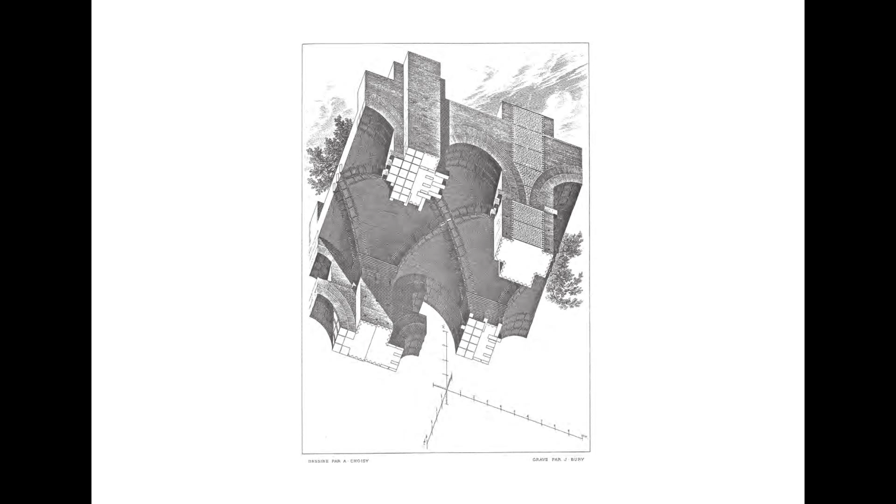And so when we're talking about this idea of fullness, obviously it's part of a great tradition of architectural construction, where we're building with massive materials, which originally, of course, was out of necessity. And this sort of exploration of a massive architecture, of a very full architecture, was really brought into question in the 19th century, early 20th century, out of questions of economy of means, where we started to really question the amount of materials that we were building with, the types of materials that we were building with, and the space that they occupied in our constructions.

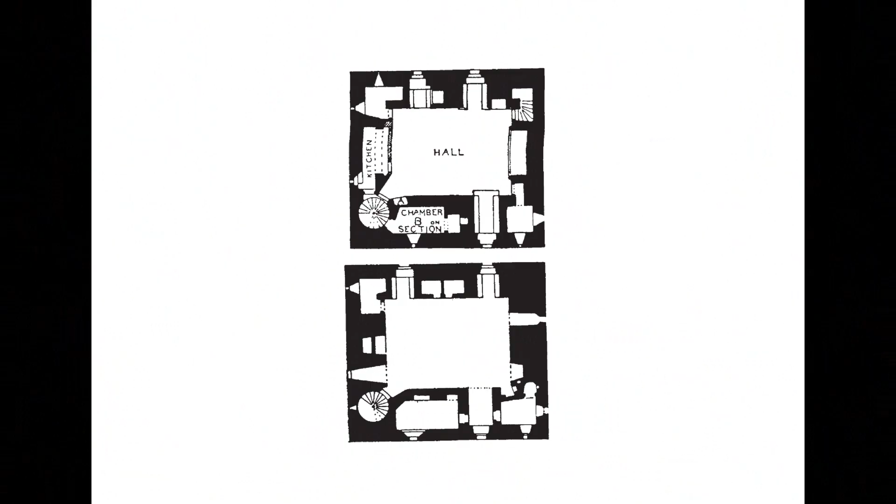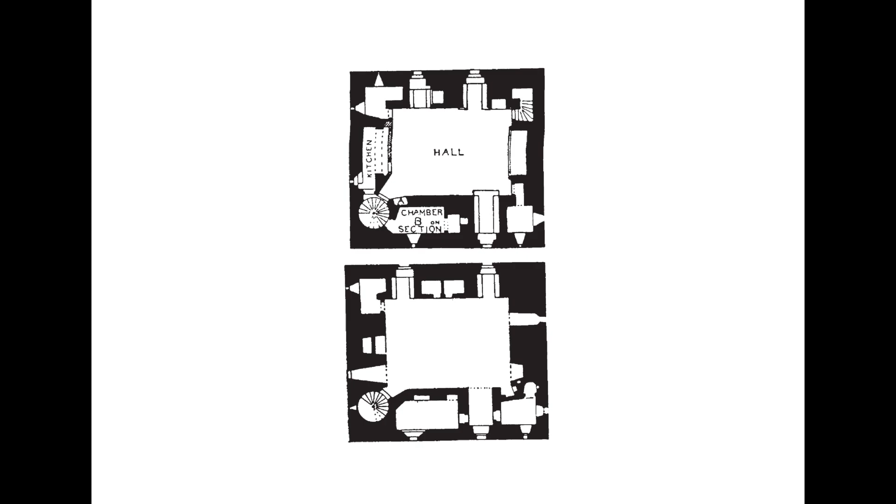But what we find really interesting is that this idea of massivity, of fullness, when we start considering it very closely, we very quickly overcome only a sort of constructive point of view. Because when we start considering fullness, we see that it's a question about representation. So of course, this great tradition of the Beaux-Arts school, where we're looking at poché. I don't know if this is the same word in Estonian, but it's this tradition of representing the architectural drawing by filling the contours of what's defining the built space.

And when we start looking at these questions of representation, obviously it changes the way that we're conceiving of the architectural project. And this is what we see in the work of Louis Kahn in his studies of the Scottish castles, is that when we start really considering the poché and the fullness of the architecture, it takes on actually a spatial quality, and we start looking at the fullness of a structure as being capable of taking on the dimension of a room, of the connection between rooms, and it's this sort of starting point, these questions which emerge from the consideration of fullness, that we find very interesting and exciting today.

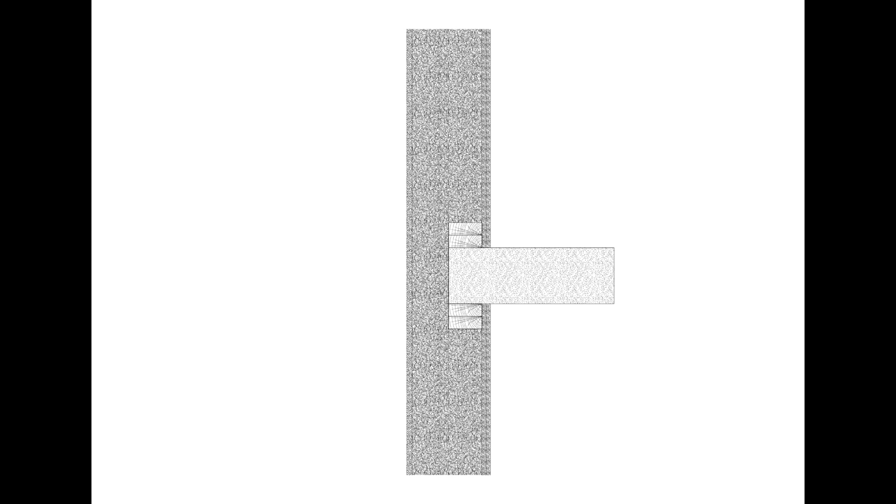And we find that exciting because what we've noticed with working with natural materials over the last few years is that when we're working with natural materials, and when we're working in the current environmental and climatic crisis within which we find ourselves today, architects are really driven towards considering the thickness, the fullness of the buildings that we're creating, and particularly in relation to the facade, which is this interface between indoor and outdoor.

And when we are working with natural-based materials, so when we're working with stone, with hemp, with straw, with all kinds of bio-based and geo-based materials, we can no longer manipulate the very fine thickness, maybe, that we've been used to manipulating over the last 50 years. These are materials that require a much larger dimension, and we think that this fullness, this very large dimension, is interesting to consider.

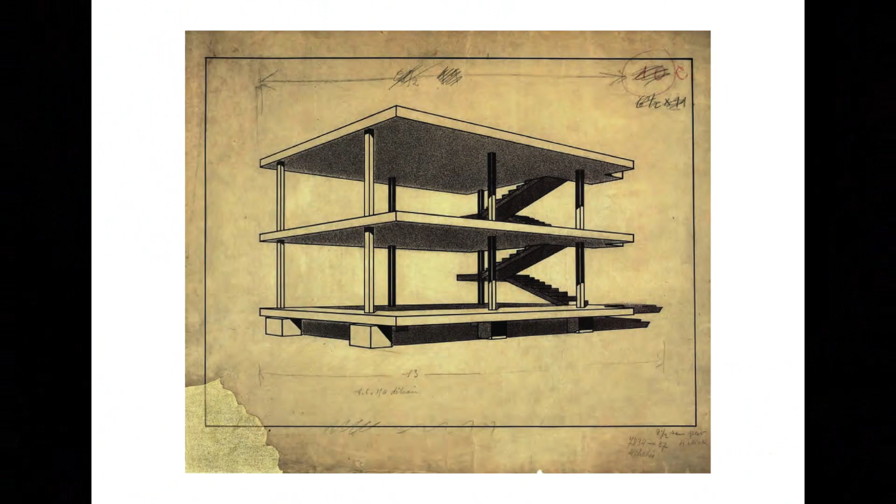It is interesting to consider in the architectural project, and we want to present this concept in opposition with this prototype of architecture, the Maison Domino, which has really come to define a sort of extreme efficiency in the way that we build, which goes so far as to completely dissolve the facade. And we think that today this is really problematic, and we can't continue to build with this image of a facadeless building. We need to consider the way that we treat the envelope of our constructions in a new way.

And so in addition to this, let's say that this diagram, this drawing made by Le Corbusier in 1914, the problem there is that the thickness is totally abandoned, and it was the beginning of an interpretation that was hoping that there would never be any kind of separation between the inside and the outside.

And what we like to investigate today, like Heather was saying, is what if we were giving another interpretation to that? What if today this ossature domino was still a good prototype to look at, but let's give it another direction, another trajectory. So it's not killing modernity in its efficiency, its economy, but rather looking at modernity as something that has another story to tell. And it's funny because in the projects we will be talking about today, we realized yesterday with Heather that they all start somehow with this prototype of ossature domino.

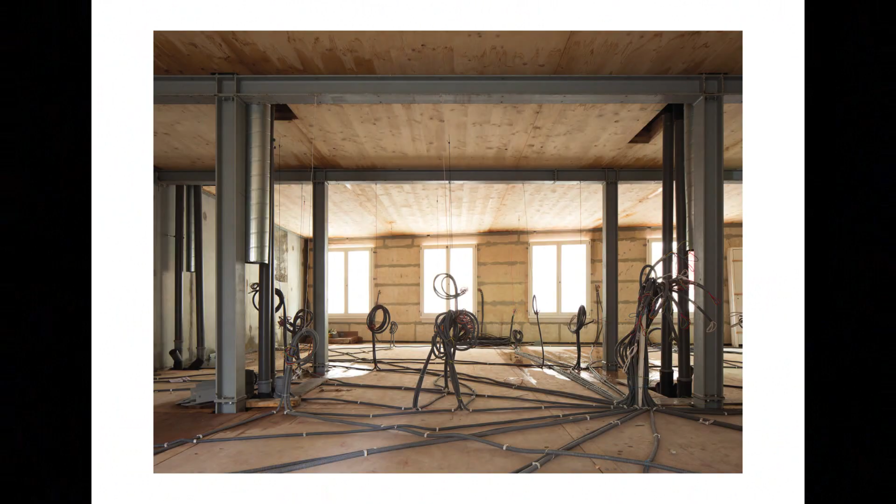So this is the building that we made in Rue Oberkampf, that we delivered a bit more than 6 years ago now. The relation with the ossature domino is kind of obvious because you can see in the foreground this steel ossature that is bearing the wood floors, and at the end you can see the load-bearing stone facade.

And it's the first time we present the building from the inside, saying that one issue with natural materials is the fact that they never come alone. They are always assembled with other materials, and when you say that you build with stones, it's not really correct. Let's say that 20% of the building is in stone, but all the rest is technical things, shafts, steel, wood, as natural as possible, but not everything is natural.

And we're very interested in this idea of natural resources, that at some point you have to negotiate when you build a building with other resources that are all geo-based resources, but they don't raise the same amount of energy going from a resource to an element of architecture. So we have to be aware that building with natural materials is still a negotiation between different trajectories.

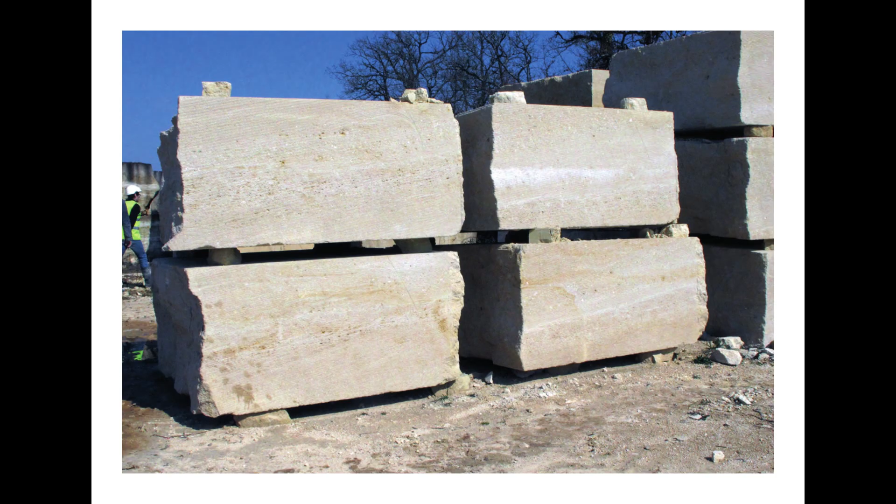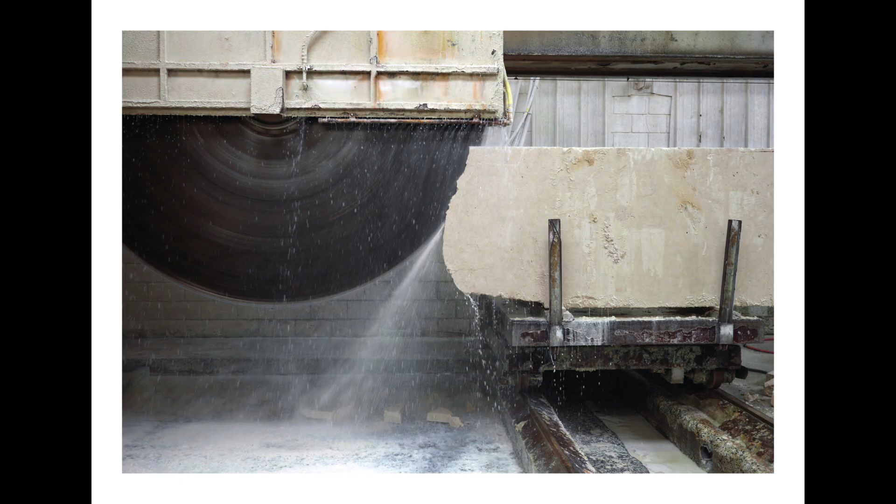So we were digging into the ground and realizing that there is something in between the moment stone is a resource and another moment where it's been dug out of the ground and it starts being an element of architecture in your mind. And what is great here with this natural resource is the very few amount of energy that exists between the moment where it is the ground and the moment where it is an element of architecture. So the very low energy engaged in the transformation, the very few displacements, all the very, very few gestures that you apply to the resource, and then it becomes an element.

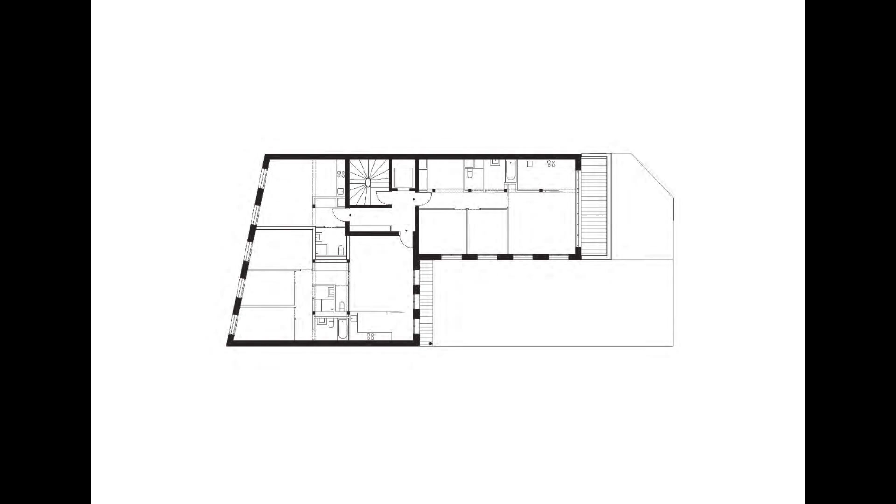So that's the plan. The pictures were taken from here, the first picture of the site from here. So you can see the two alignments of steel structure. And then from here, this is the inside courtyard.

And again, we are very interested in applying to the stones other elements such as concrete to kind of get around or to escape from this war between stone and concrete, which always has been profitable to the cement, let's say. So we kind of stay out of the debate and rather defend the idea that stone has to be more and more important in the building industry. But cement will always be here, sometimes for good reasons.

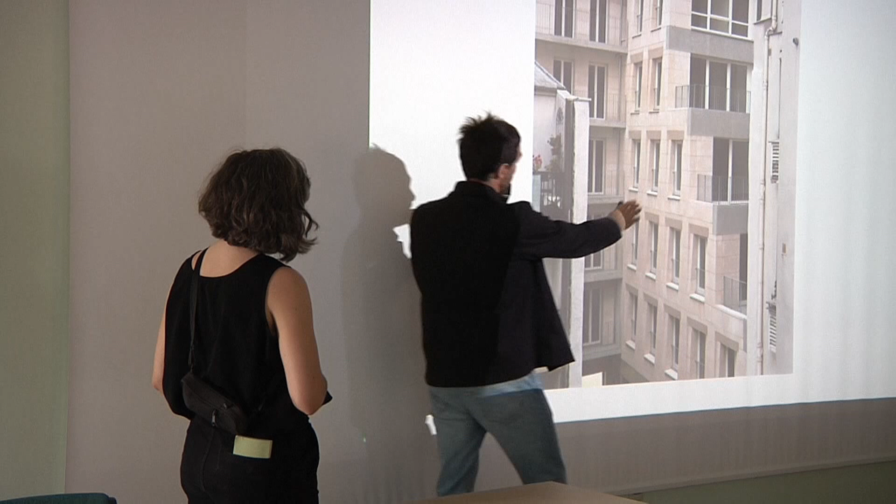And we're very interested in the way they negotiate together and how cement gives to the stone some actuality, some contemporaneity, let's say. So we use it as lintels in this part of the building, in the inner courtyard, to give to the living rooms bigger openings on the outside.

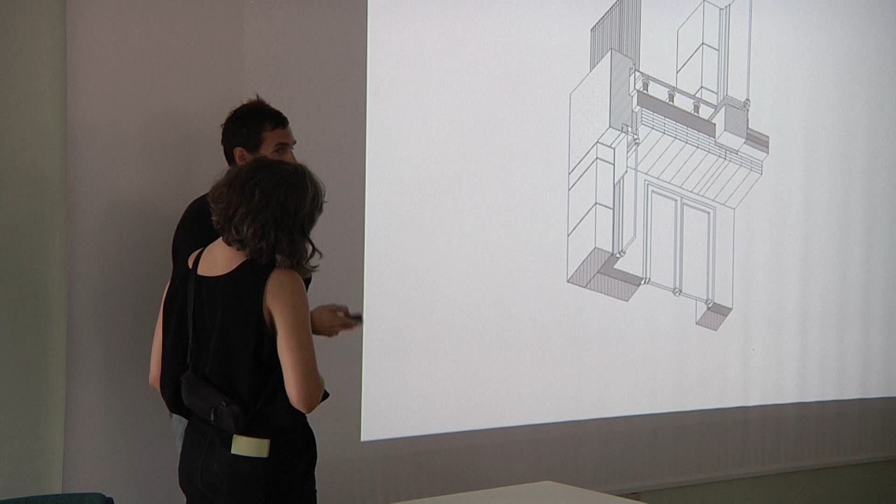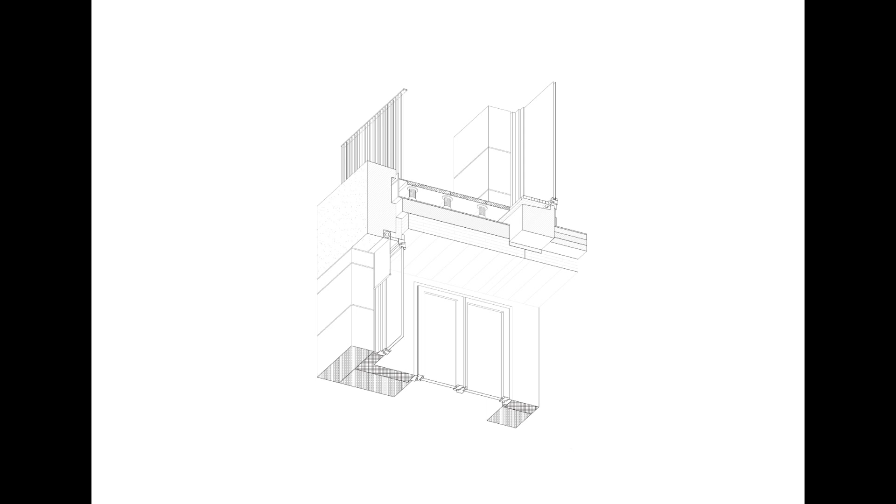And we draw, just like the drawing Heather was talking about at the beginning. Drawing the building is something that we do a lot, drawing the construction details to always express that we need to represent the detail, the construction, how things come together, how they negotiate together, and how through this assemblage we give to any kind of element of the assemblage a power to participate in the architectural language. And this is the drawing and the fascination we have for drawings that gives us this availability to understand the position of each object, just like Choisy we were talking about at the beginning.

From the outside again, so you can see the relation between the concrete, the basement, and the facade. So let's say that we're keen on showing that we have concrete underneath, so we like to say that concrete goes a little up, and that it defines a ground floor for the building, and then gets the loads from the facade.

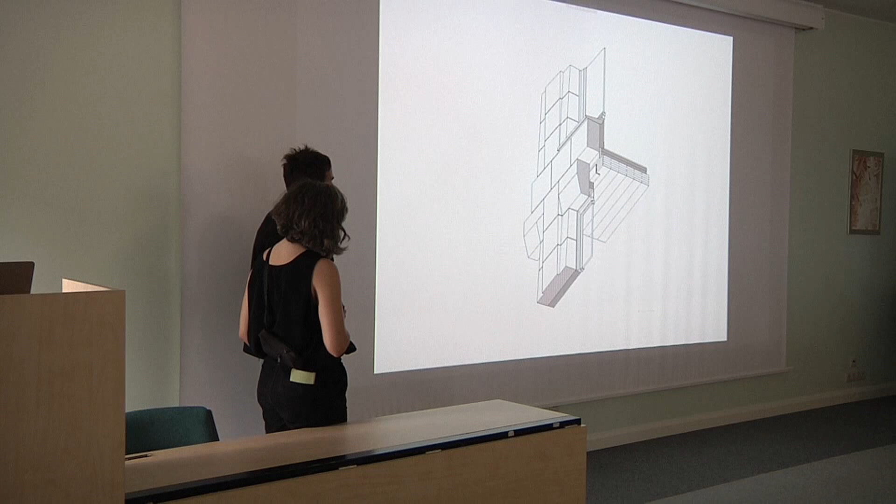Another drawing that shows this facade, so you can see, like we said, the relation with the load-bearing facade. You have a steel element here, and then the floor, the wood floor, giving its load to the load-bearing facade.

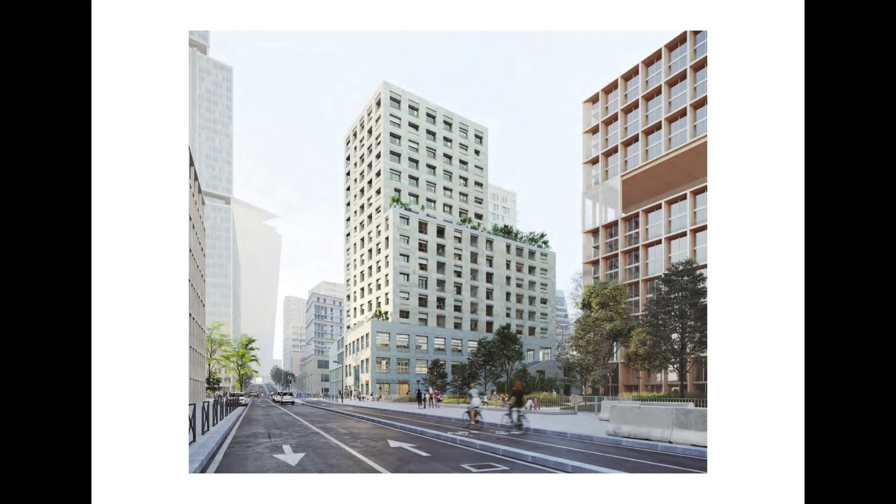And then we scaled up a little bit, from the very same kind of constructive system from Oberkampf. We won this competition 3 years ago now, so the site will hopefully begin at the end of this year. But it's exactly the same principle. So you have concrete on the basement that links two levels of the city, one high level and one lower level here, and then the load-bearing facade upstairs.

So we have there different kinds of stones. We have hard stones, getting more loads, of course, and then a little softer stones on top of the building.

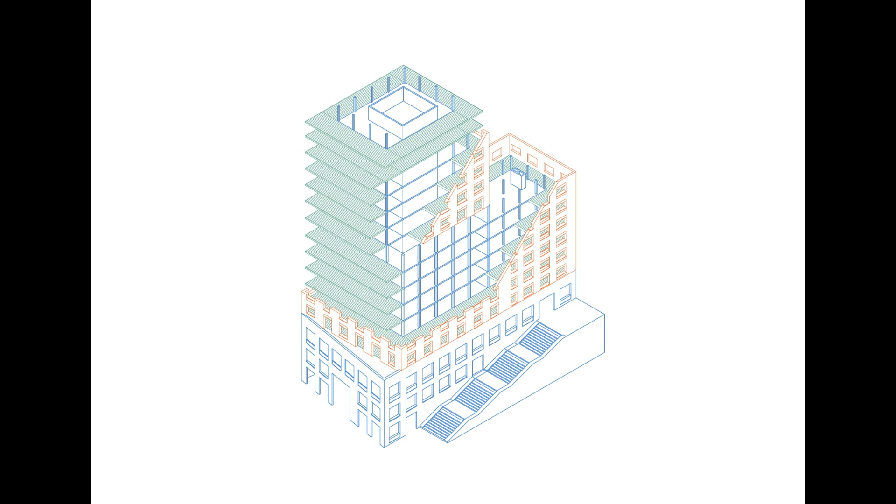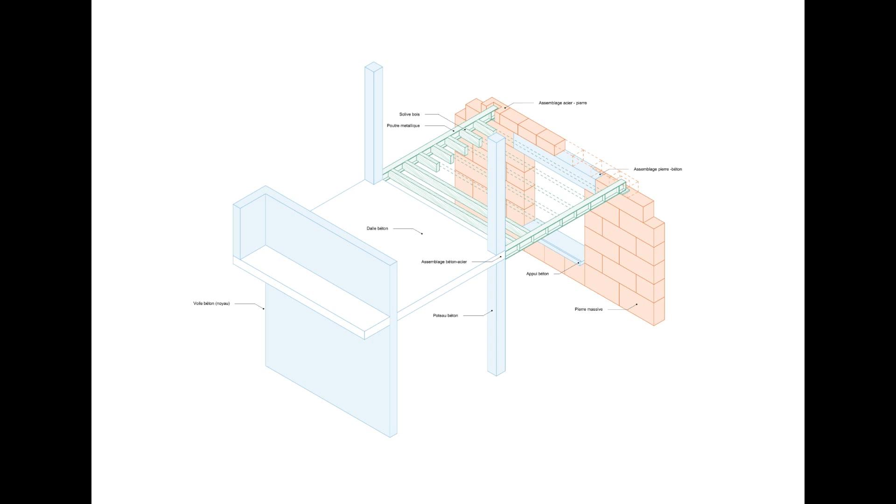And so this first project is looking at thickness from a very massive, maybe a structural and a gravitational point of view. This is another project where we're looking at this idea from a more thermal point of view. So this is an operation of social housing that we completed maybe two years ago.

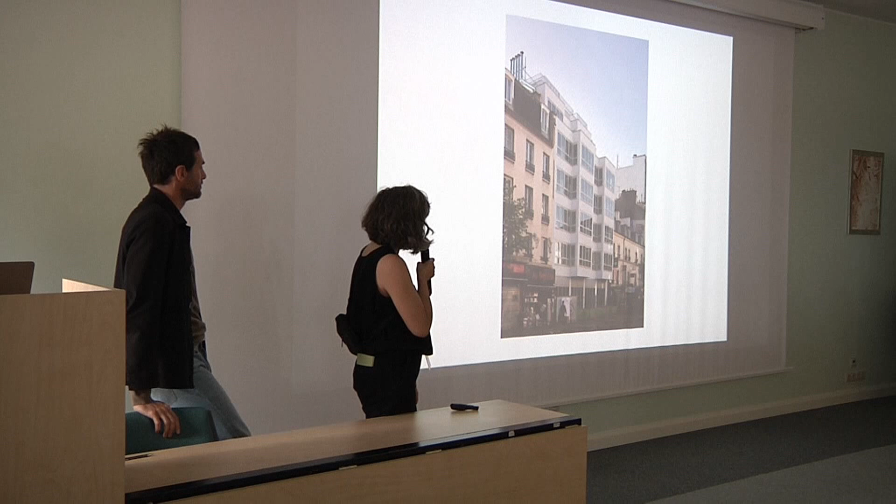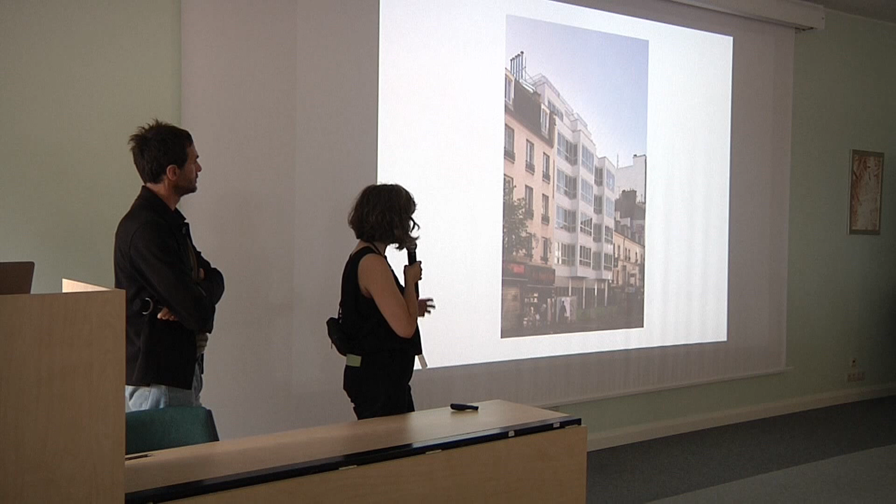And it uses a hempcrete facade, so this mixture of hemp and lime, and it's looking at the facade as an element of thickness, technically thick for thermal reasons, but also that starts to explore the spatiality of what a very deep facade can offer in terms of spaces. And so again, we find this relation with the Maison Domino. So we're not in any way trying to deny the efficiency of this structural system, but questioning the way that we can make it even more efficient, even better adapted to current conditions and requirements.

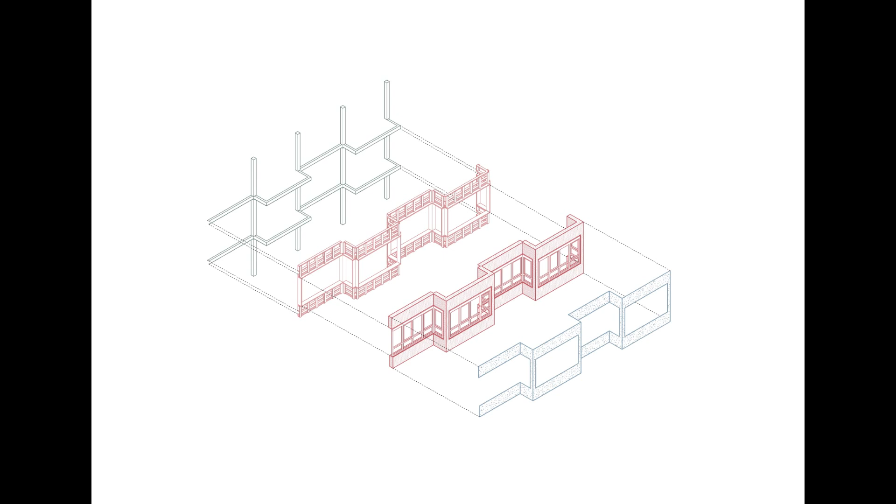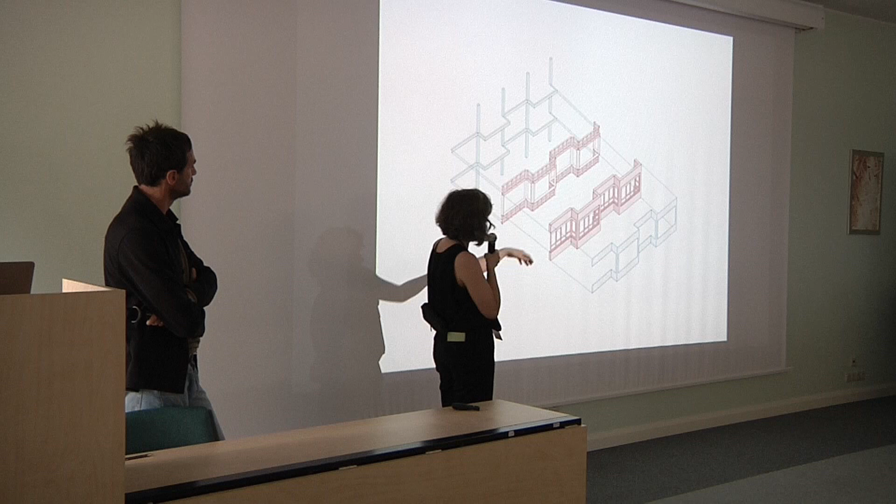And so here we see the system of the facade. So we have the concrete internal structure, a secondary timber framework within which we project the hempcrete mixture. The hempcrete attaches itself to this timber framework, and then a render finish on the exterior part of the building.

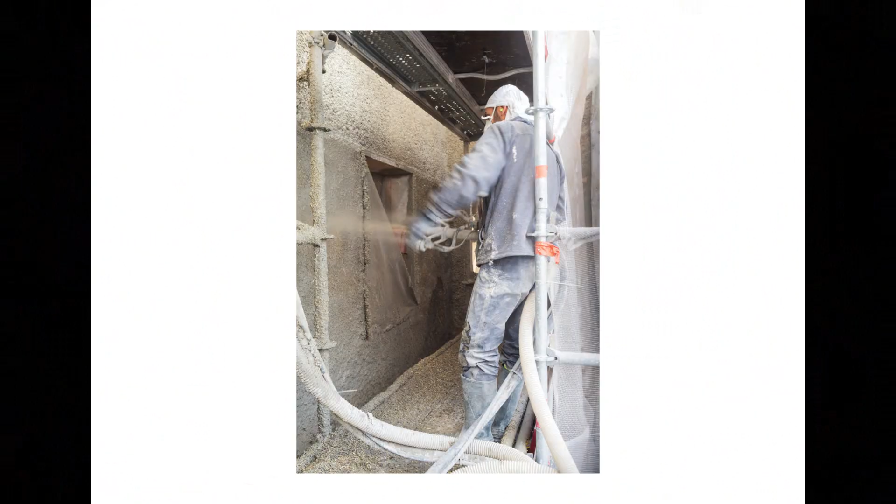And so it's a research project that we've been working on in partnership with the Université in Paris, trying to better understand these hygrothermal properties, the system of pores that exist within this material, and what it can offer in terms of level of comfort within the architectural project. And so again, looking really closely at these materials, it's going out to the production site, it's working with researchers, but it's also being present on the construction site.

So I don't know if this is a subject for you in Estonia, but in any case in France, there's a real problematic tendency right now to evacuate architects from the construction site, and we think it's important that we hold this place in order to understand the construction of the buildings that we're designing.

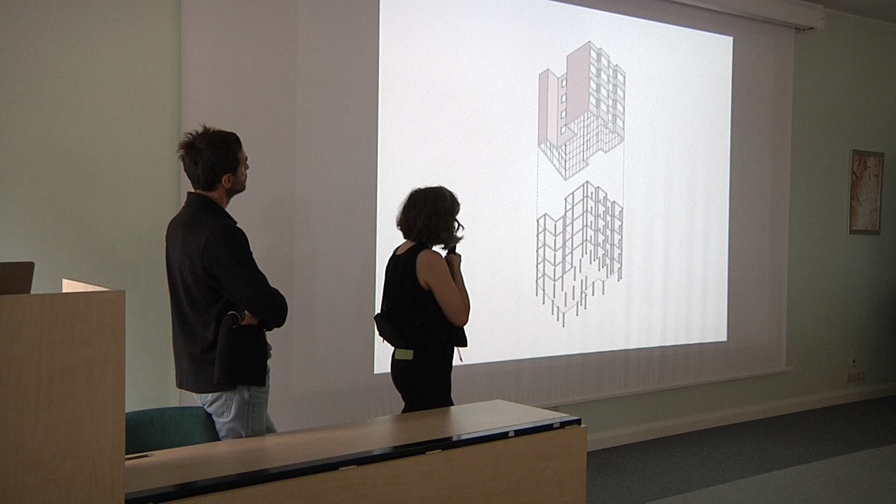And so here we see the projection of the hempcrete. So hemp can be poured, it can be prefabricated, but in this case it is projected into the secondary timber framework that we saw earlier. And so again, it's this idea of enveloping a concrete structure where we try to use the least amount of concrete. So working with just a slab and post construction, and then this very thick insulating cover, which comes and envelops the totality of the building.

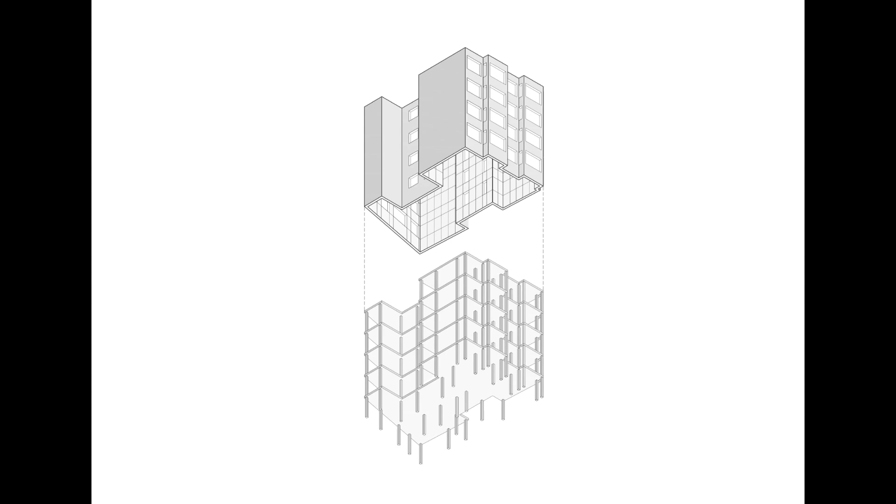And so again, this is a detail of the facade, and we see the ways in which working with the idea of thickness also starts projecting itself into the spaces, into the quality of the spaces we're creating, where the rooms are navigating within this thick facade to project themselves out at certain points, living spaces out towards the street, or recessing inwards towards the apartments.

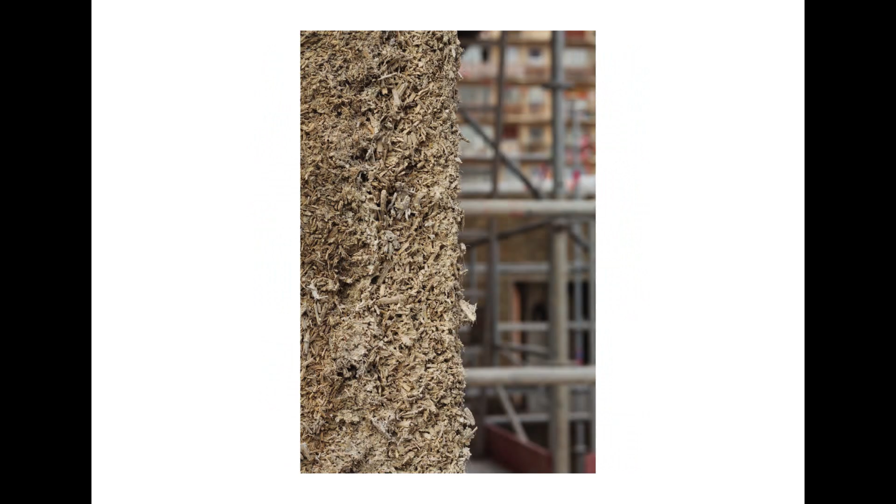And if we go back to the construction site just a step, this is a zoom of hempcrete. This is what the hempcrete looks like up close. And it's interesting to consider because compared to other bio-sourced insulators, which is often wool insulation, here we're working with the hemp straw, which when it's combined with the lime, really gets suspended. So the lime solidifies, and the hemp fibers get suspended.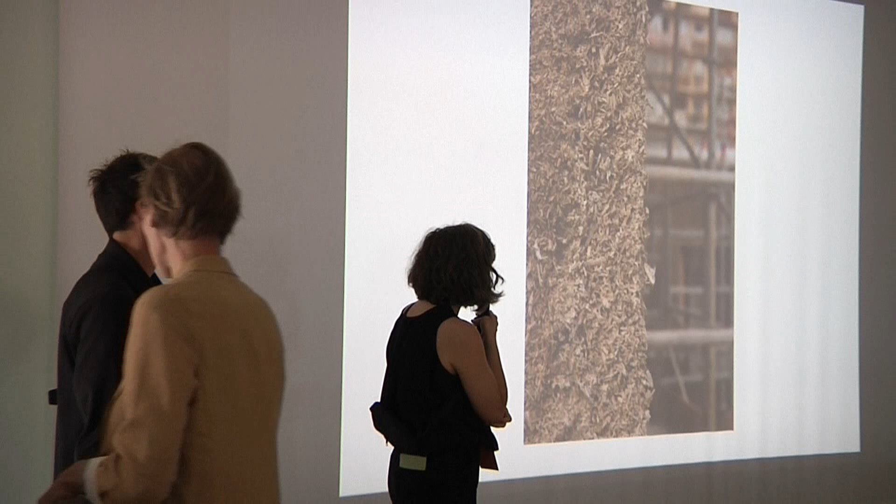And this is what is very interesting from an insulating point of view, because it traps air within the facade, but it also has qualities of inertia, which come from the use of lime. And so the presence of the air that is within this insulating element is another idea that we find very, very interesting to consider.

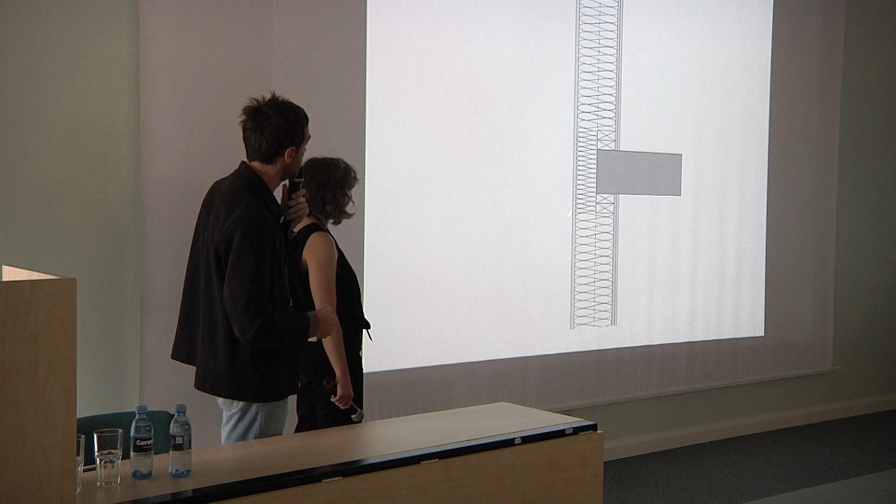So this is how we represent, let's say, a facade and a plinth. This is another way to represent it from the building Heather was talking about. So you can see the stucco, the insulation, hempcrete, but so far insulation was represented like this. And then the 2 Fermacell panels on the inside. Then you have here the concrete slab and pieces of wood that you were seeing on the axonometric view previously that hold, let's say, the hempcrete together.

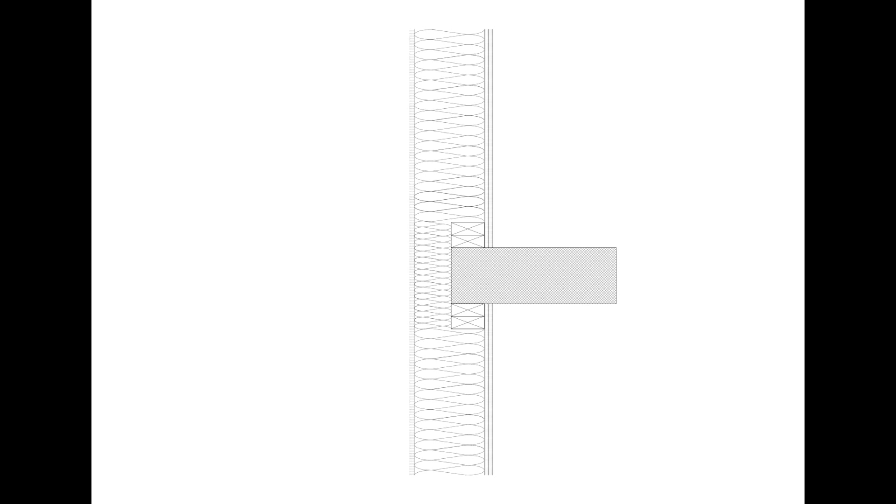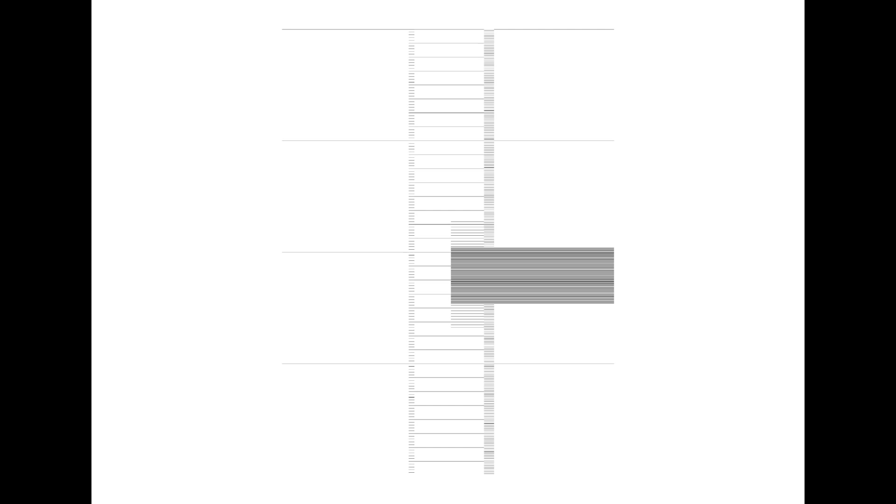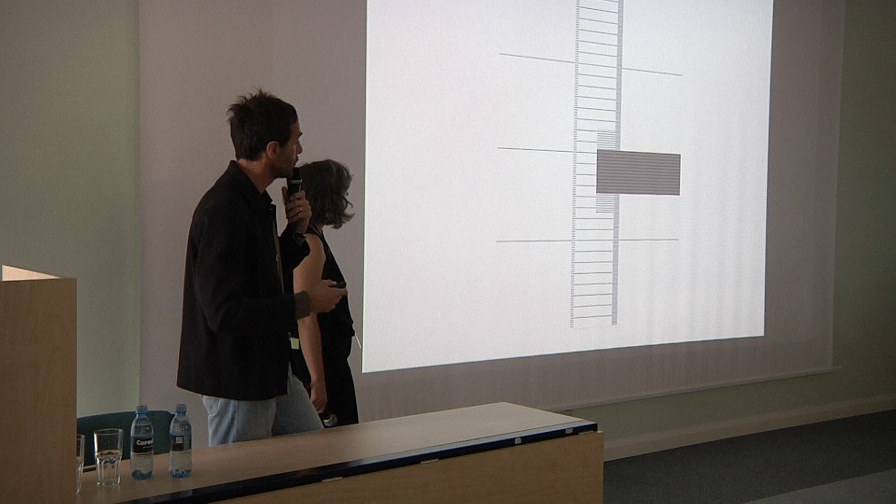But again, we can reconsider the way we represent the thing and introduce the question of the air. This drawing represents porosity. So we bring in and start representing anything that is in the frame: air, plaster, hempcrete, Fermacell, and air, the inside slab. So we start saying that air is everywhere, but this represents density. So density of the air, density of the stucco, density of the limestone, the hempcrete, density of the concrete. So you can see the concrete gets a lot of power in the drawing.

Then you can talk about conductivity, and this is something different. Porosity. So you can see that air becomes super strong in the drawing, and that hempcrete loses its power in this matter of... the word again, sorry. Yeah. Conductivity, sorry.

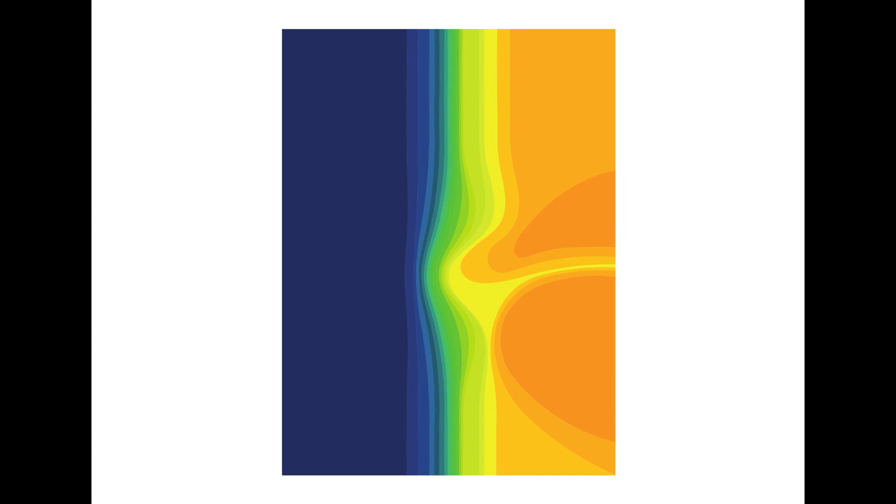And then this is temperature. So we were very interested in representing several aspects of the materiality of the materials constitutive to a drawing. You can see the characteristics that we were showing on the previous drawings, but you also have phenomena that we want to represent, such as temperature in winter, for instance. And you can see that the temperature of the air is giving a temperature to the facade, and then it slowly increases the temperature because of the insulation and the heating coming from the inside of the building.

So this is again a way to participate in this idea of rationality, of rationalism, that kind of arose at the end of the 19th century. And in addition to the structural, because we don't say that we replace it with conductivity, effusivity, density, everything. I mean, this is not replacing charges and loads, but we believe that rationalism has to embrace another level of consideration, technical considerations related to the idea of the air.

So that's, of course, to talk about comfort, because this is hemp all around, but we can still have large openings because of the availability of the envelope, the thickness, the fullness of the envelope, to manage relations between the inside and the outside, and also to raise the idea of the thick facade, the thick bow window, the thick window, when thickness, fullness becomes something that sometimes you can inhabit within the apartments.

And maybe as a conclusion, this is what we were saying at the very beginning during the presentation: this idea of natural materials is for us, rather than a statement, of course something we believe in a lot, because we have to drastically reduce the amount of carbon from the building industry. But we also believe that this relation we have with natural materials is giving us a new role in the world industry, let's say, as citizens of the world.